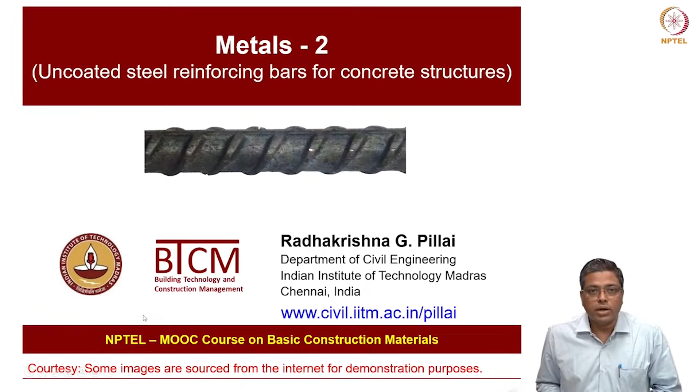In this lecture, we will look at uncoated steel reinforcement. This is the outline of this module on metals. In the previous lecture, we looked at iron and iron products and how they are manufactured, cast iron, etc. And today we are going to look at steel reinforcing bars, in particular uncoated steels we will cover today, and then coated steel, pre-stressing steel, and some test methods and specifications we will cover in the following lecture. And following that, there will be one lecture on structural steel by Professor Arul Jayachandran.

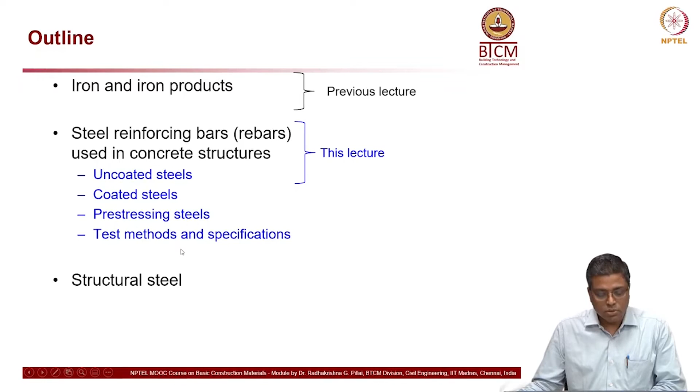Okay. Now, how is steel manufactured? We already looked at it, and why it corrodes. We looked at it in the previous lecture. Just wanted to emphasize one aspect here, that steel is manufactured from iron ore. So essentially, because of the heat treatment and the mechanical treatment given during the manufacturing of the steel, the energy level of steel is higher than that of the iron ore.

So when we use this steel in concrete structures, the structures get exposed to moisture, oxygen, carbon dioxide, chloride, etc. And in those exposure conditions, the steel will get corroded, and this corrosion is nothing but extractive metallurgy in the reverse direction. And the corrosion product has a similar chemical structure as that of iron ore.

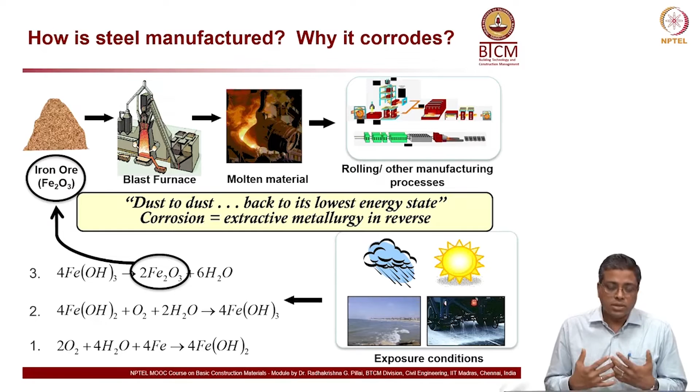Okay. Also, one more thing I would like to mention is that iron ore is heavily used for manufacturing of steel in India even today. Majority of the steel manufacturers use iron ore as the raw material, but if you go to most of the developed world, they have started heavy use of scrap metal as raw material for manufacturing steel. So the use of iron ore is less, but more scrap metal is used. And in India, we are still using a lot of iron ore as raw material.

So this is just a quick look at the manufacturing process. Essentially, the rebars are made from billets. Billets are prism-shaped elements which are produced first, and then they are put into some kind of roll to make different steel sections, including the rebars. Okay, different types of dies are used for that.

Now let's look at how the steel industry evolved. Okay, this slide shows the steel industry started with mild steel in the 1950s. I'm not covering the things before, just the last few decades. First we had mild steel in 1950, then galvanized rebars were introduced, but later on people stopped using galvanized rebar. Then HYSD, or high yield strength deformed bars, were used.

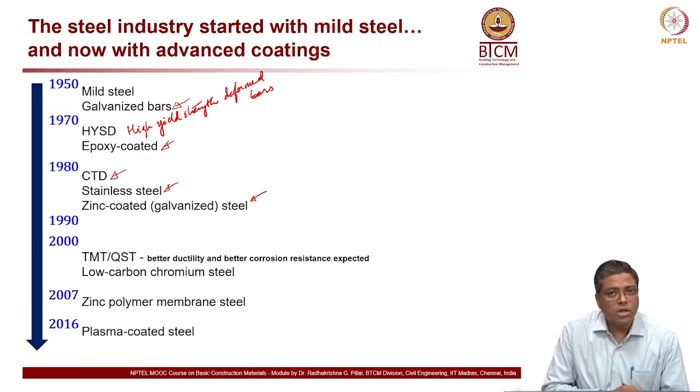Then epoxy coated rebars were introduced in the 1970s, and in the 80s we started seeing cold twisted deformed rebars, then stainless steel, then again galvanized or zinc coated steel came into the market. And in the 1990s, not much change, but after 2000 we started seeing TMT, mainly for ductility and corrosion resistance, higher strength also, without really modifying much of the manufacturing process, so not too much cost. It was a low cost option to enhance the ductility and at the same time get better strength. And also low carbon chromium, which is corrosion resistant steel.

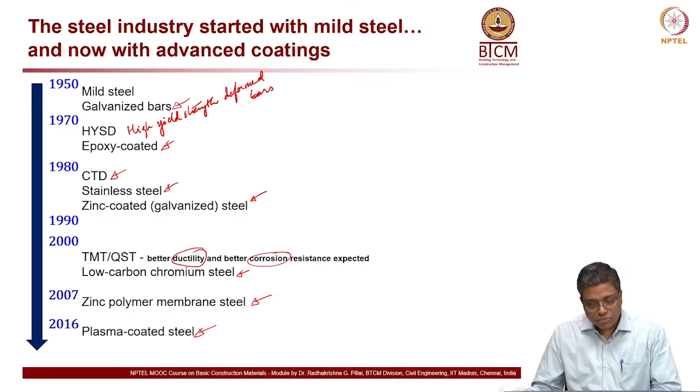And in 2007, zinc polymer membrane steel, again coated reinforcement. Now the latest version, there is one more type of coating coming, called plasma coated steel. It's essentially again galvanized coating, but done at a plasma level, that means a very fine microstructure level. So this is just to show you a glimpse of how the steel industry evolved over the past few decades.

Now, of all the steel that is manufactured, whether it is plates, sheets, rebars, whatever, all the steel put together, 30% of that will be steel rebars. Okay, in India, that is the kind of distribution. And Tata, JSW, Jindal Steel and Power Limited, Steel Authority of India, Rashtriya Ispat Nigam Limited, RINL, also called Vizag Steel. These are some of the major steel manufacturers, but there are numerous other companies which make steel. In fact, these numerous other companies contribute about 65 plus percent of the steel rebars made. In fact, greater than 65%.

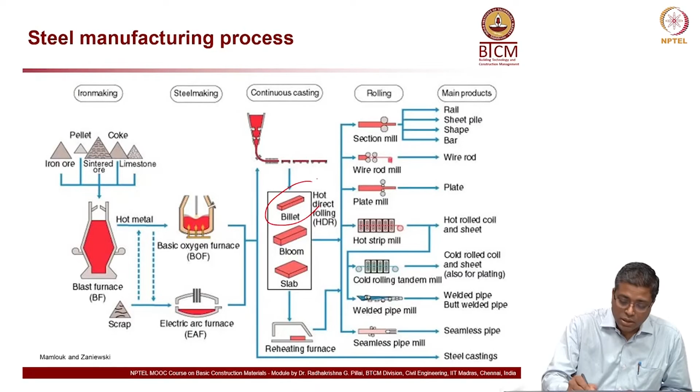So you can see so many companies are out there which buy the billets from the manufacturer, like the billet here, they buy and then produce the steel rebar. Okay, so now all these 30% of the steel which we are talking, they are all rebars.

All these rebars are governed by this one standard specification, IS 1786, published by Bureau of Indian Standards. So all the steel rebars have to meet these specifications, the mechanical and chemical properties which are given in this standard, so that they can be used. They are bound to meet these specifications, and this is for high strength deformed steel bars and wires for concrete reinforcement.

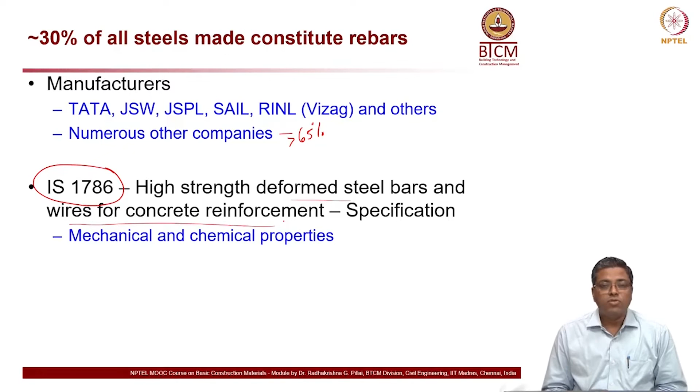Now what are the different grades available, or to be precise, the strength grades available? You have studied already stress and strain. There is something called yield strength. So this is one of the grades, let's say Fe 250. Fe stands for iron. We have so many of these grades available in the market: Fe 250, 415, 415D, 415S. I will cover these in the next lecture in a little bit more detail. However, what is this 250? 250 is the yield strength of the steel.

So steel rebars with different yield strengths are available, and they typically range from 250 all the way up to 700. But the 600 and 700 are not widely used, very rarely. They are also not much available. But 415, 500, 550, etc. are available. So these are the bars which are available in the market today.

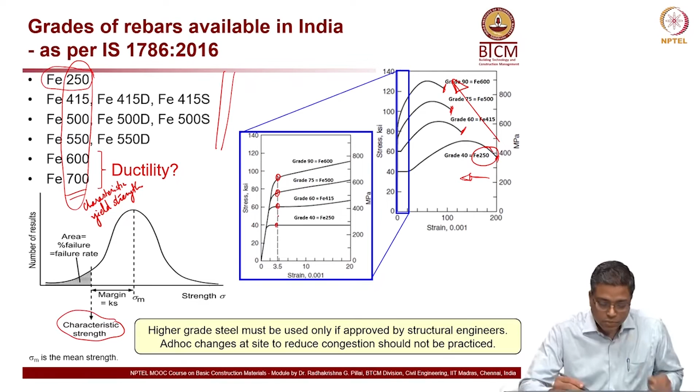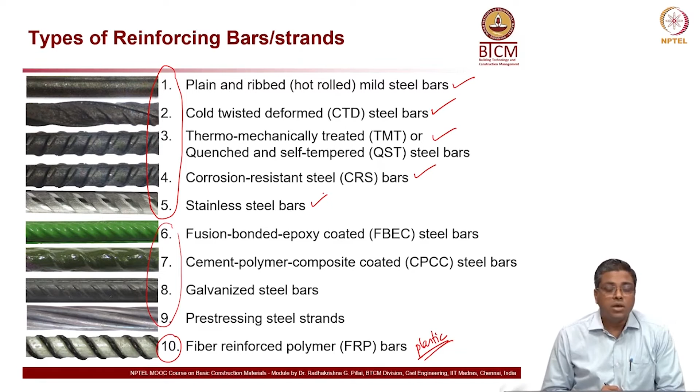Now, item 1 is plain and hot rolled or mild steel bars. 2 is cold twisted rebars. Number 3 is the one which is widely used today, TMT bars. Then corrosion resistant bars and stainless steel rebars. These are the 5 types of reinforcement which we are going to look at in the coming slides. Now, plain and ribbed or hot rolled mild steel bars.

Now, another type of bar. Before we go, these are also mild steel. Typically, these bars are of Fe 250 grade. And there was a demand for increasing the strength. So people tend to go for strain hardening, or this is the next generation type of rebar which came: cold twisted deformed bars, or high yield strength rebar. It's also sometimes called HYSD, high yield strength deformed.

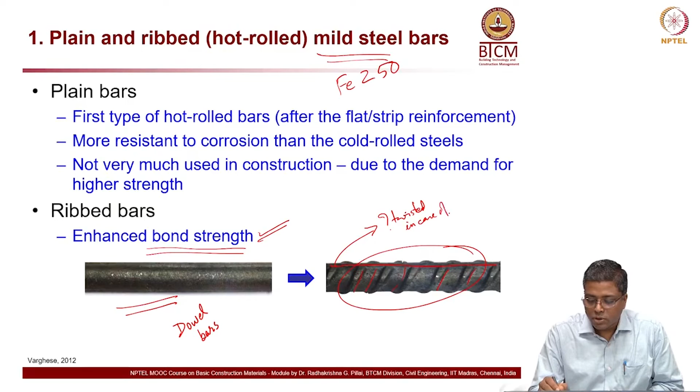So when we do this cold working, or work hardening, or strain hardening of these rebars, it's done at a temperature which is called cold, but not cold for you. That temperature is between about 400 to 700 degrees Celsius. So it's essentially the temperature below the recrystallization temperature of the steel. When the molten metal gets cooled and the temperature reaches this 400 to 700 range, at that time it's colder than the recrystallization temperature.

So at that temperature the rebar is taken and then twisted, and then we get this type of cold twisted deformed bars. And the problem with this bar is there are some residual stresses. Because of these residual stresses, resistance to corrosion also decreases.

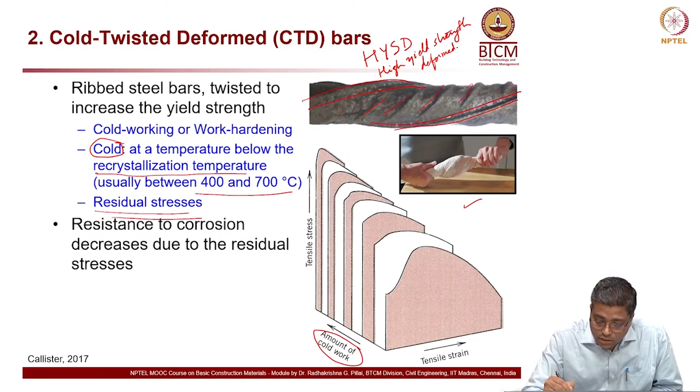Now before we go more into that, let me just tell you, when we do this deformation or cold working, this graph here indicates that. As the tensile strain or the amount of cold work is increased, the yield strength is increased. If you take this point as the yield strength, it also tends to increase. Yield strength increases. Also the tensile strength, the peak value, is also increasing.

So this is the tensile strength. Sorry. This is the tensile strength curve, and this is the yield strength, and this is the tensile strength. And also ductility decreases. Anyway, the point is these bars were heavily used for a couple of decades, in the 1970s, 80s, etc., but now not much in use.

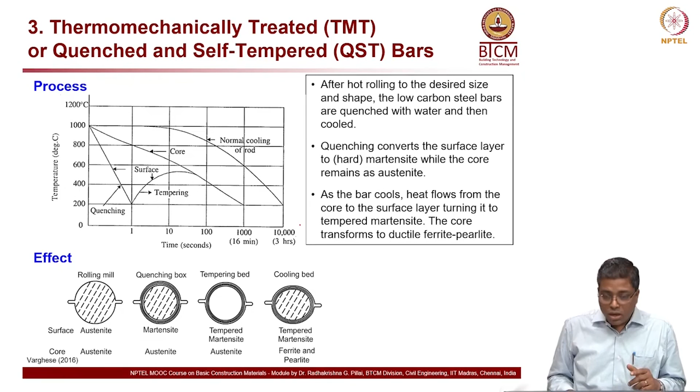It's now TMT steel which is being made. But if you go to structures which are some 20-30 years old, you will see these kinds of bars used. You can look for the shape of the ribs or seams on them.